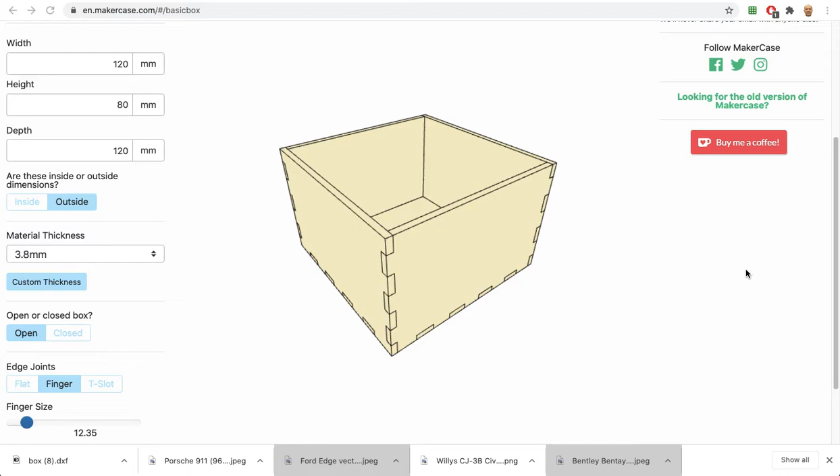For this activity, I want to look at how we can import DXF files into Onshape to create a 3D design. I'm going to be using a program called MakerCase.com, which will enable you to design and make box shapes.

So for this, I've got a box that I can enter the measurements for. I've set my parameters to millimeters, and I've chosen 120 by 80 by 120. I'm using outside measurements, and the material thickness is 3.8 millimeters. I use the custom thickness here because that's not one of the set thicknesses, since that's the thickness of our birch ply at school.

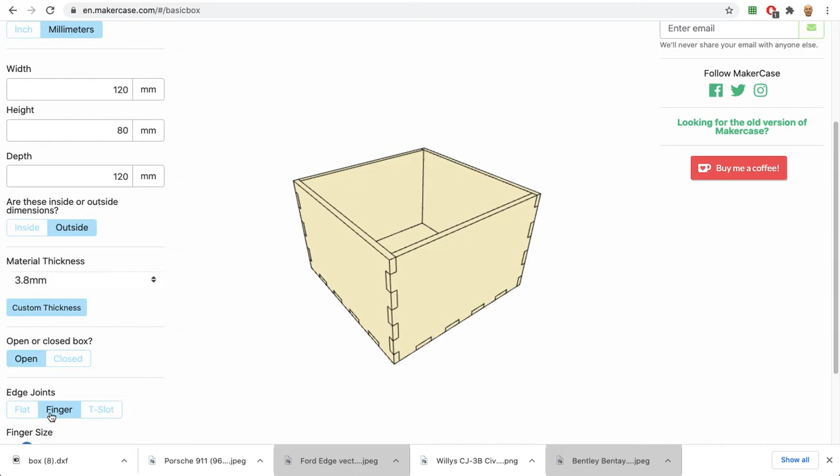I'm making an open box and I'm going to be using finger joints for it. I've set the size here as well, so you can set the size of each of the joints. Once I've got that, I'm happy with the parameters for this.

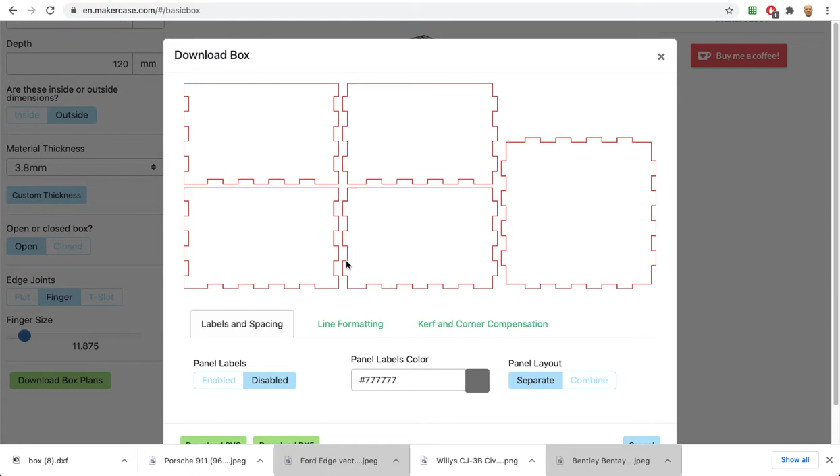I'm going to go to download box plans, and that'll bring up this window with the box net laid out. You can have labels on it, but I prefer to have those off. You can combine them into one design, but I would have them as separate parts, like so. There are a couple of other things like line formatting, kerf, and corner compensation, which we don't need to worry about.

Then I'm going to download them as DXF plans. Download, and that's going to download into your downloads folder. Okay, once that's done...

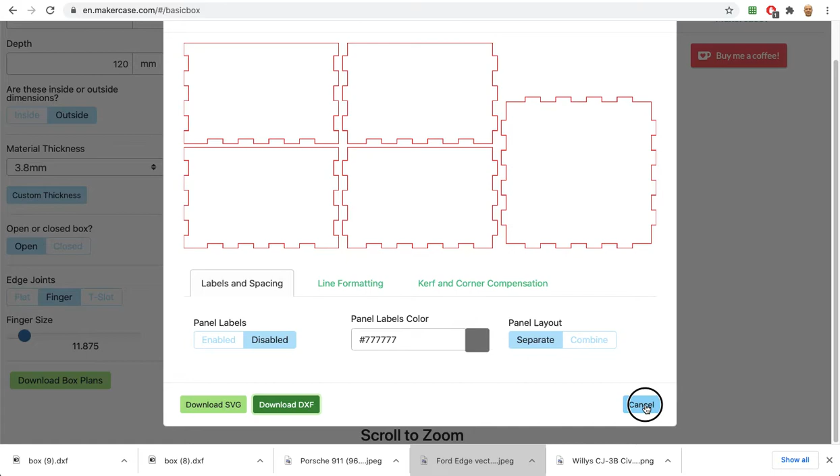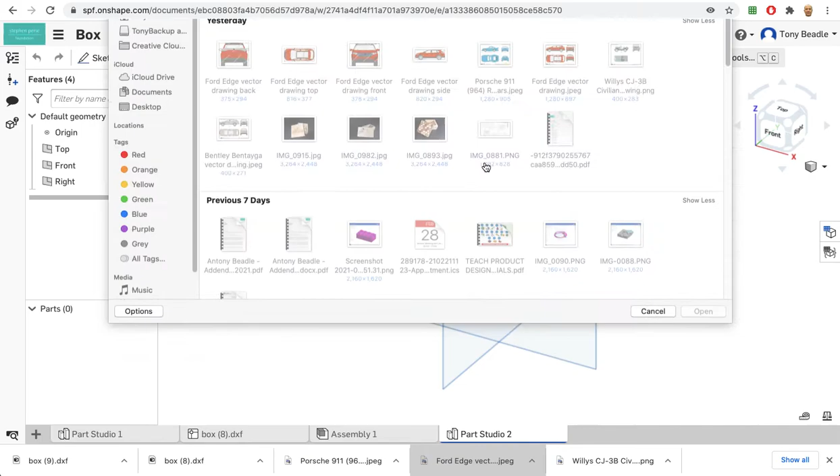Then I'm going to go to my Onshape and start with a new part studio. I'm going to insert and then import the DXF plans, pointing to the box design area that I've got saved. I can see I've already done this one, so I'll open that. That will import the plans into Onshape.

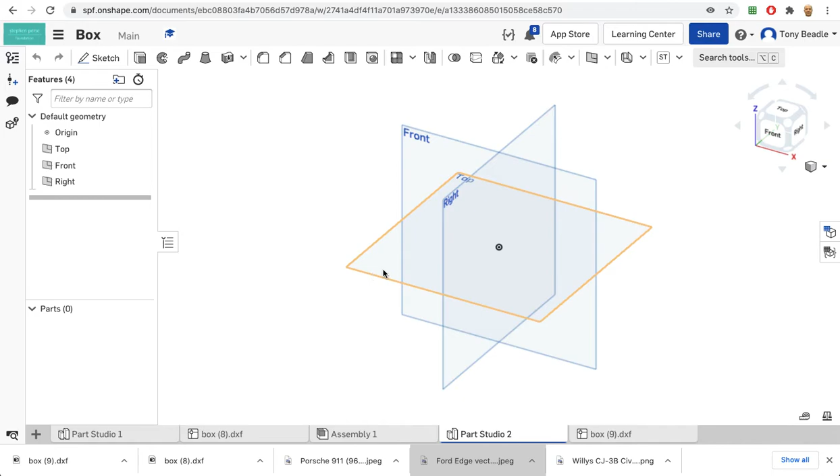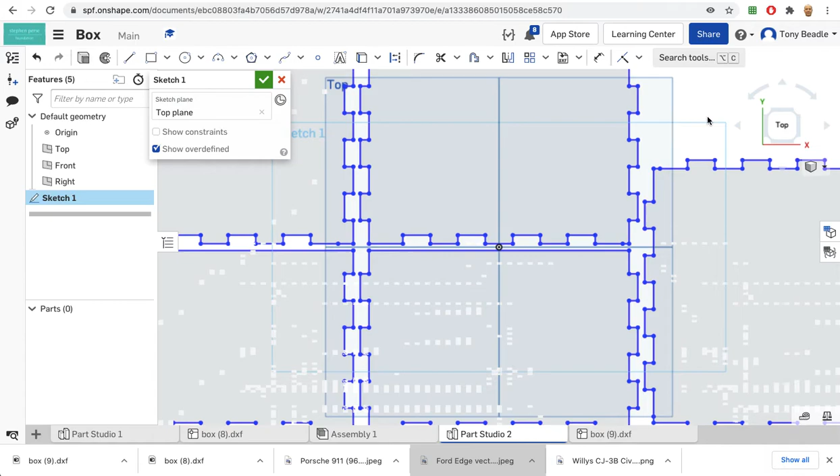So we now have some DXF plans imported in. Now the point of this is that we want to use these plans to save time in drawing. So I'm going to go to my top work plane and click on top view, insert a sketch, and on this menu you've got the option of inserting a DXF file. We have a DXF file we just imported, box 9. I can click on that, and it will import the DXF file taken from the MakerCase website. So we have a pre-drawn DXF file, which saves you having to do all the dimensions for this box because it's already been done in MakerCase.

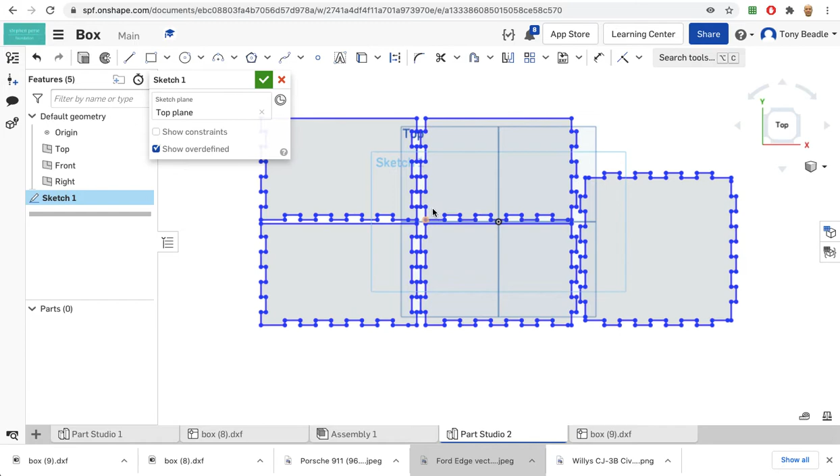With that sketch there, I could make changes to the surface design if I wanted to—I could add holes to it, I could add some text. There are other things I could do, but for now I'm just going to extrude the shape, to the thickness of the material we had, which was 3.8 millimeters.

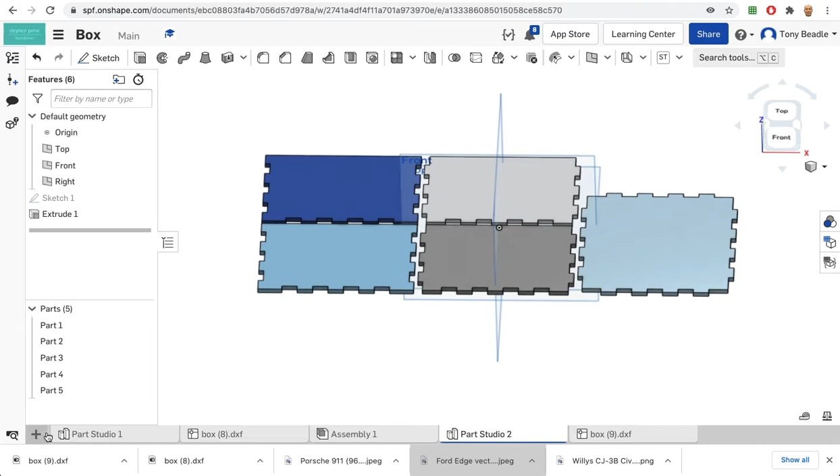So we're changing it from a plan to separate parts. It creates separate parts for each of them, which is really handy because we're now going to assemble this design. I'm going to go to plus and create an assembly here. If you're starting this from fresh, you already have an assembly tab, but I've already used mine.

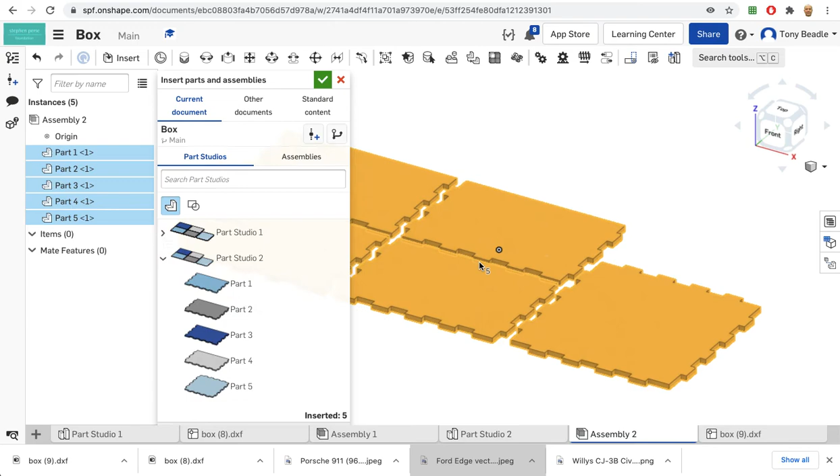So I'm going to go to Insert, and I have the part studio already set up because I've already imported this one in. I can import each of the parts into this, or I can import individual parts - you can import it all in one go, or import them as separate items. So let's import that in, and we have all the items in.

Green tick that. I'm going to choose one of the parts as the base for it, so that's going to be fixed. I can click on that, move it to the position I want, then right click and fix it in place. You can see that's now got a fixed part on there.

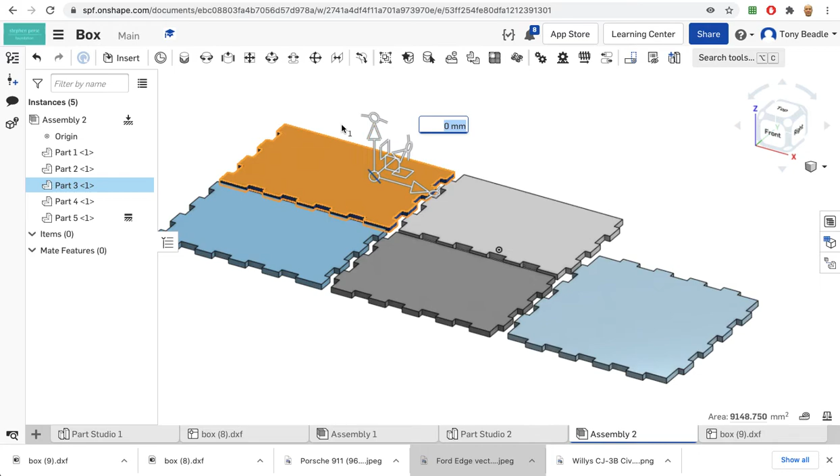The other parts are now free to move around, so I can use my arrows to move these into various positions that I want, and then start to rotate those and position them to assemble them.

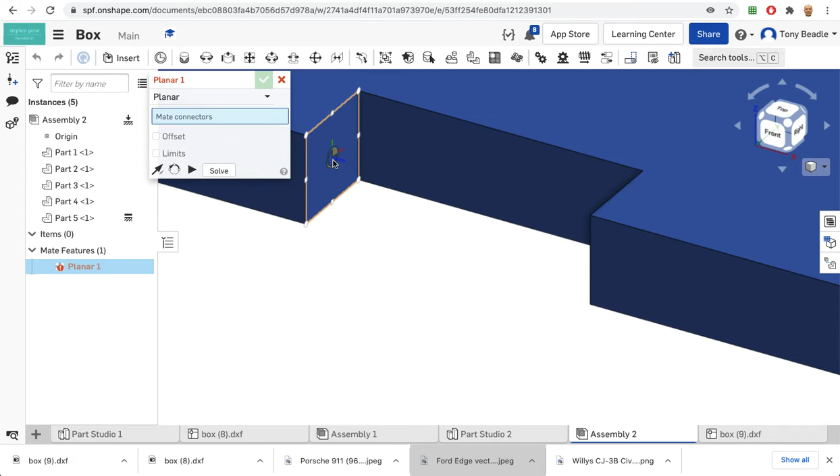We can look at taking a planar mate for this section here. Let's move this over and zoom right in. I'm going to take a planar mate, grab the center of this square here, much like we did with the other part, and look at where that's going to line up, which is going to be here.

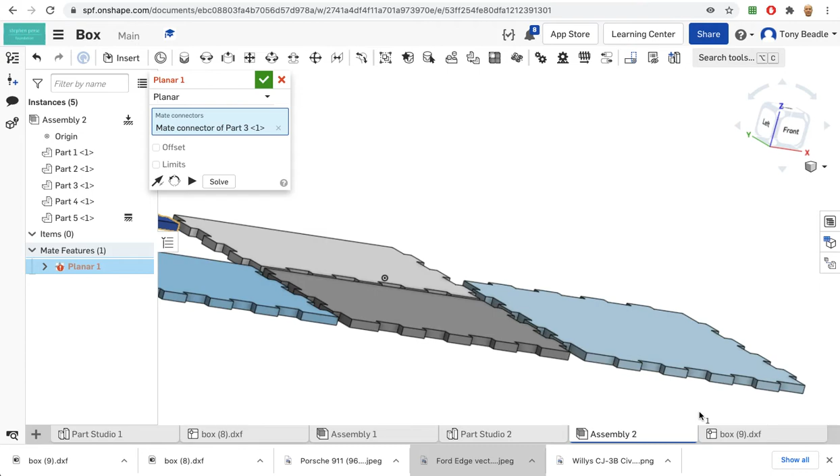So let's rotate this around - difficult with all these parts. I would actually probably import individual parts and put them in rather than trying to do them all in one go, but that should work, so that should bring it there.

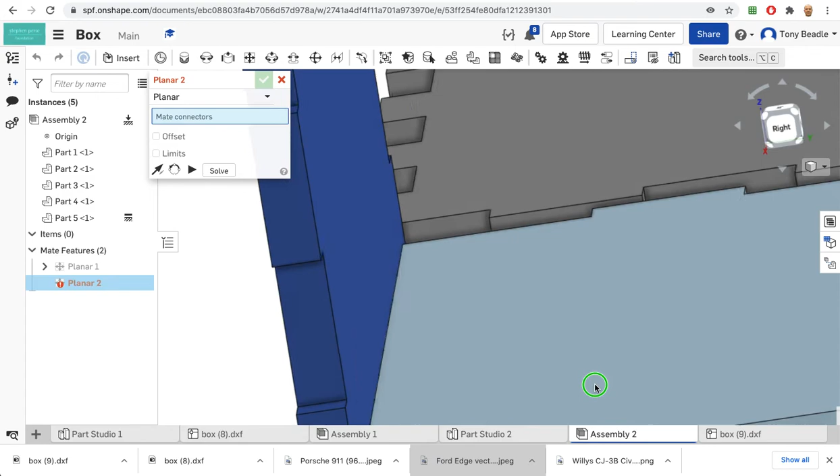Now you'll notice it seems to be lying on top of each other, so we can use our rotate axes to get it to the position we want, and when we're happy we can green tick that. You could add a second mate as well, but this seems to work as a single mate for the moment, so I'm just going to close that off.

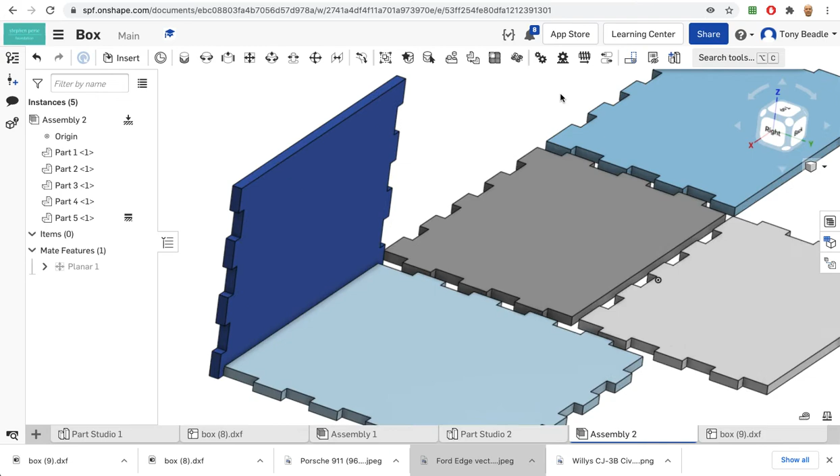And then I can start to assemble the rest of the parts in place using my planar mate function. So we can look at the second panel, which will be similar to that one here. Let's grab a part and put a mate onto this section here.

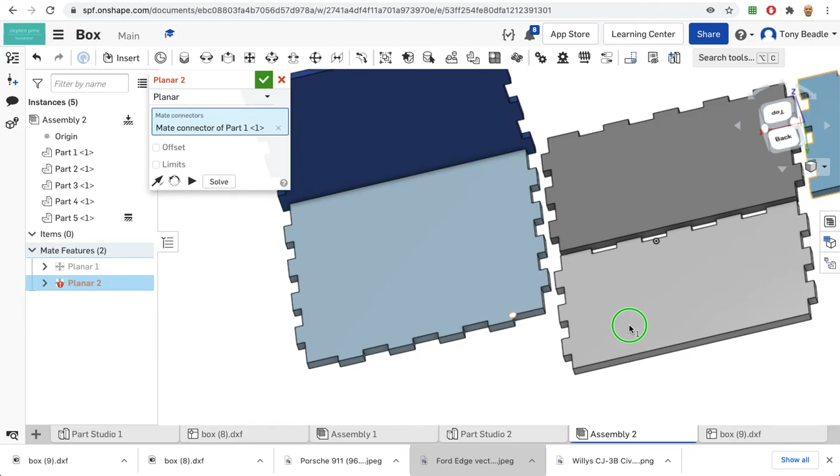We need to zoom right in to find it - there we are, that part there. And that will then planar mate onto, let's see, that surface there. This is tough - let's get down to there. There we are. Once again it's positioned, so you can flip the primary axes, flip it around, rotate it.

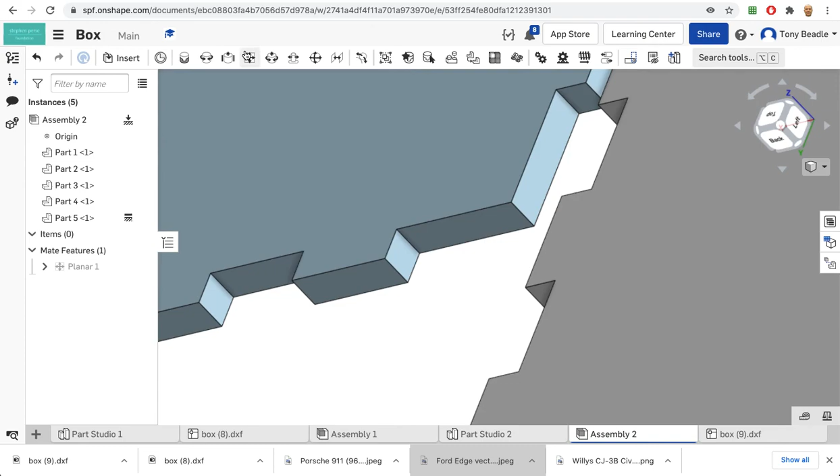I think actually I would probably miss that by one point, so I'm going to close that and try again, because I think I should be looking at the planar mate for there instead. So let's put a planar mate onto that surface there, and then go back out again and find the right part.

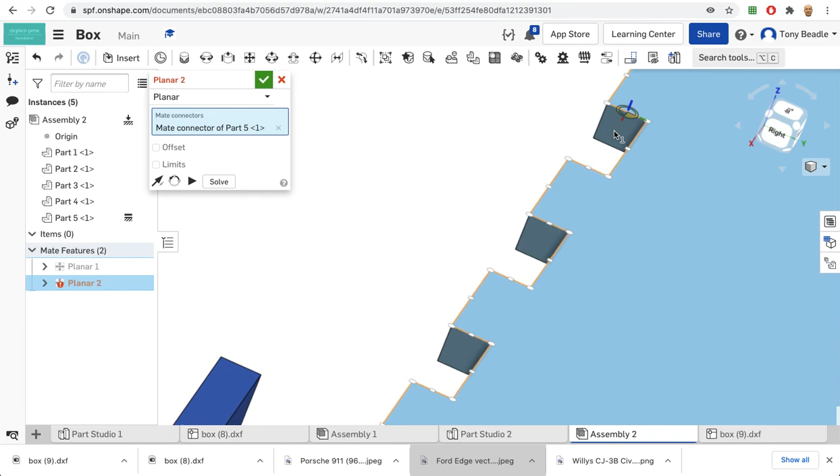So it's going to be one there, isn't it? There we go, that one there. And we'll see if that's actually put it in place for us - yes, that looks happier now. Okay, then we can use our rotation to rotate that to the right position, and then green tick that. So you can build up your assembly by using your mates until you get your final box.

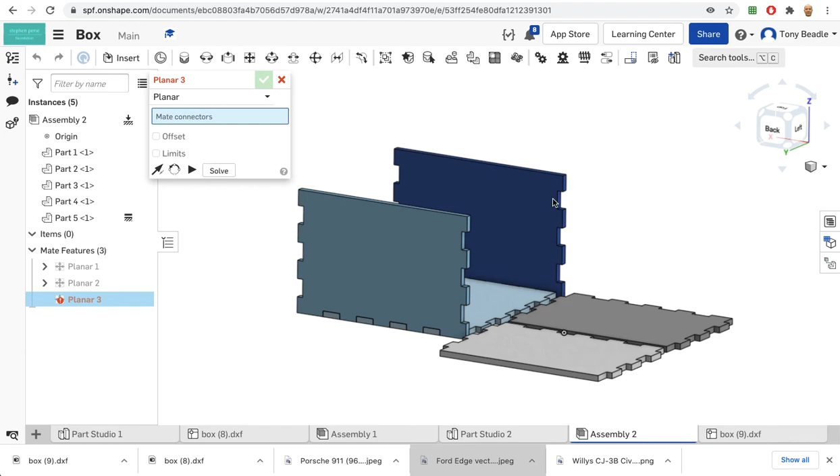But by importing the DXF, you're saving a lot of time on having to create each of these panels, because you can pre-create them using the MakerCase website. Okay, looking forward to seeing your results.